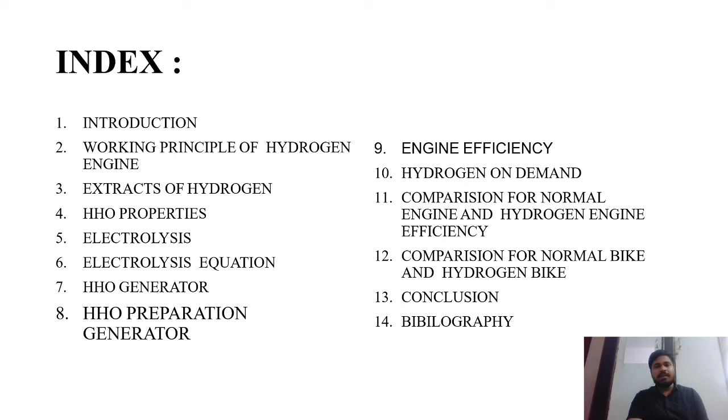In this PPT we will discuss the following topics: index, introduction, working principle of hydrogen engine, extract of hydrogen, HHO properties, electrolysis, electrolysis equations, HHO generators, HHO preparation generators, engine efficiency, hydrogen on demand, comparison for normal engine and hydrogen engine efficiency, comparison for normal bike and hydrogen bike, conclusion and bibliography.

Now we introduce the introduction. The hydrogen vehicle converts the chemical energy of hydrogen to mechanical energy either by burning hydrogen in an internal combustion engine or by reacting hydrogen with oxygen in a fuel cell to run electric motors.

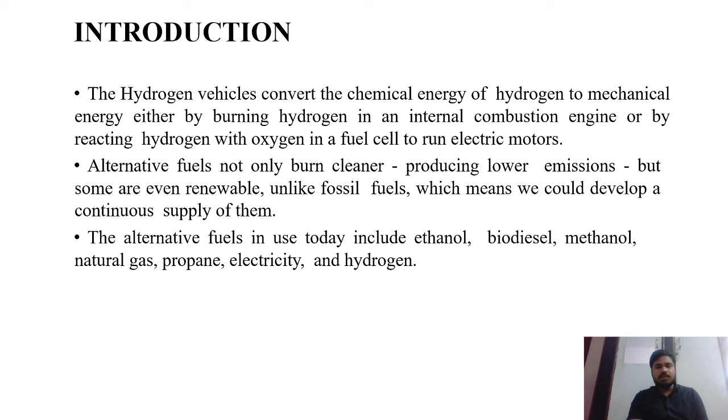Alternative fuels not only burn cleaner, producing lower emissions, but some are even renewable, unlike fossil fuels, which means we could develop a continuous supply of them. The alternative fuels in use today include ethanol, biodiesels, methanol, natural gas, propane, electricity, and hydrogen.

Next topic is working principles of hydrogen engine. Hydrogen engines are considered by many people to be an excellent alternative to fossil fuel engines. A hydrogen fuel cell engine works by mixing hydrogen and oxygen, generating electricity during electrolysis.

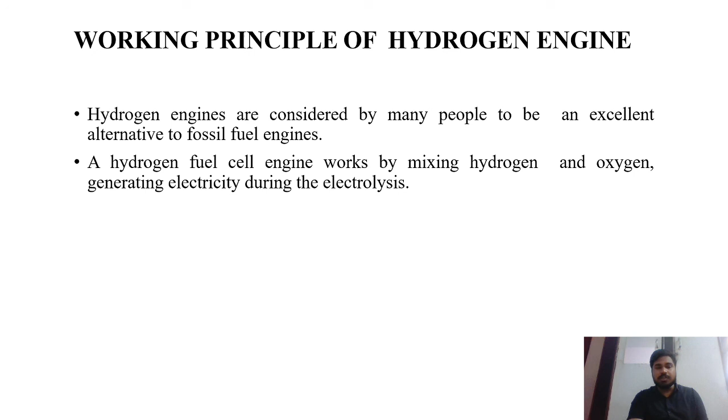The next topic is extract of hydrogen. Hydrogen, natural gas, coal, petroleum gas, electricity, nuclear and biomass.

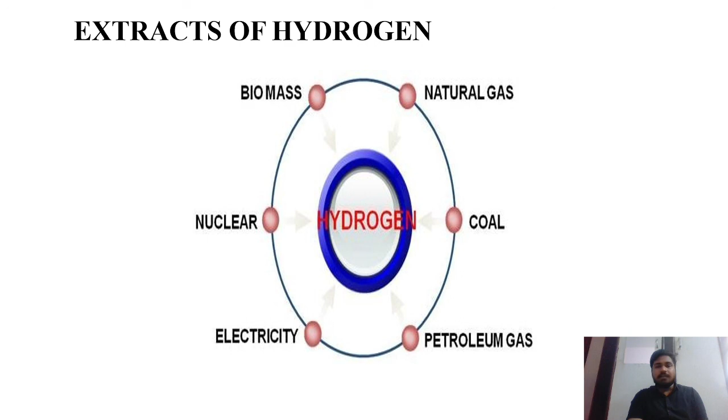The next topic is HHO properties. HHO gas proves to be odorless, colorless and lighter than air. HHO has a number of distinct features that distinguish it from water vapor, brown gas and other variants.

In the production of HHO gas there is no evaporation process at all, the electric energy used being insufficient for evaporation. HHO gas does not follow the fundamental PVT law of gases. Fifth, HHO gas can instantaneously melt tungsten, bricks and other highly refractive substances.

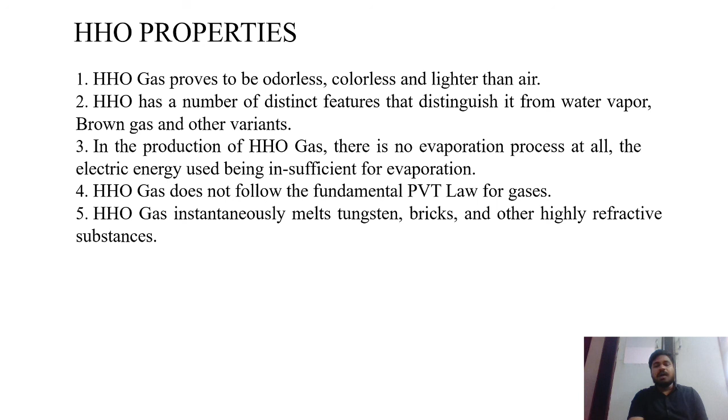The next topic is sustainable path to hydrogen. Renewable energy. Renewable energy sources are of four types: heat, electricity, biomass and photolysis.

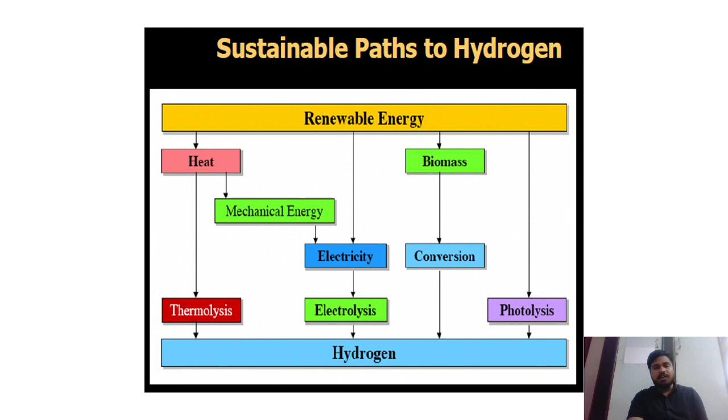Heat, thermolysis converts to hydrogen. Mechanical energy converts to electricity, electricity converts via electrolysis, and electrolysis converts to hydrogen. Biomass conversion yields hydrogen and photolysis converts to hydrogen.

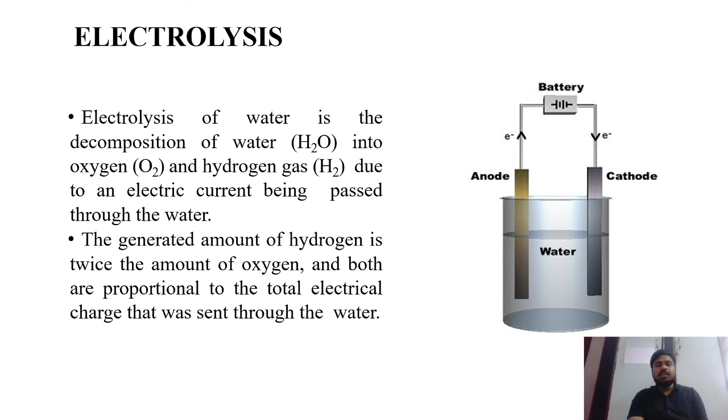The next topic is electrolysis. Electrolysis of water is the decomposition of water H2O into oxygen and hydrogen gas H2 due to an electric current being passed through the water. The generated amount of hydrogen is twice the amount of oxygen, and both are proportional to the total electrical charge that was sent through the water.

The next topic is electrolysis equations. Electrons required for this reduction will come from the power source. The equation is 4H2O plus 4 electrons gives 2H2 plus 4OH minus. Finally, we can supply our overall equation: 2H2O liquid gives 2H2 gas plus O2 gas.

The next topic is HHO generators. The HHO generator is really an electrolysis device based on an invention from the late 19th century. Hydrogen fuel cells, also known as HHO fuel cells, are designed to increase the efficiency of internal combustion engines.

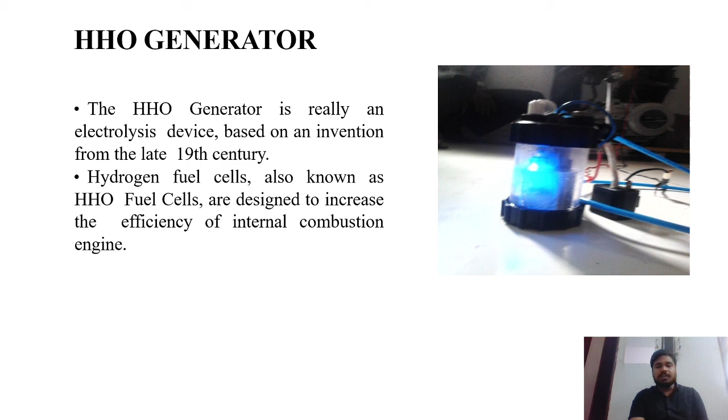The next topic is HHO preparation generators. Four electrodes, tubes are about 3 mm thick and 1, 3 by 4, 1 by 2 inches long, made of stainless steel 304 grade. An 8 mm gas vent hole is drilled from the gas outlet to the cap. The electrolyte level is always about 25 mm below the gas vent hole.

The electrodes are arranged in an alternate manner: minus, plus, minus. The two negatively charged electrodes are connected to each other through gas welding. Each electrolyzer contains 4 sets of electrodes.

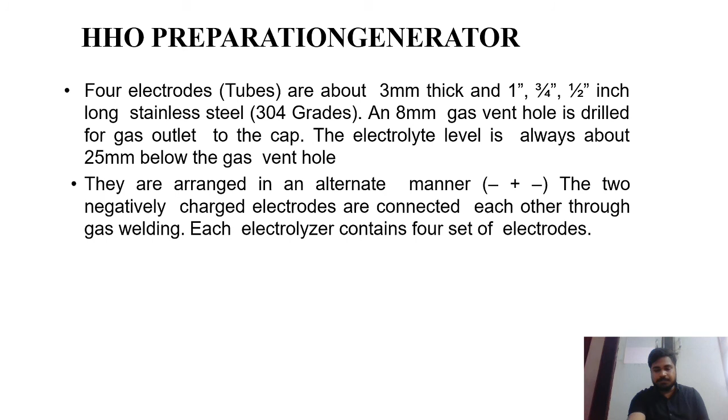The next topic is engine efficiency. Engine efficiency is based on the engine specification. The following power calculations are done, with the nomenclature of the following terms.

N is equal to speed of engine in RPM. T, torque transmitted in Newton meters. PM, mean effective pressure in Newton per meter square. L is equal to stroke length in meters. A is equal to area of cylinder in meters squared. K is equal to number of cylinders. And efficiency.

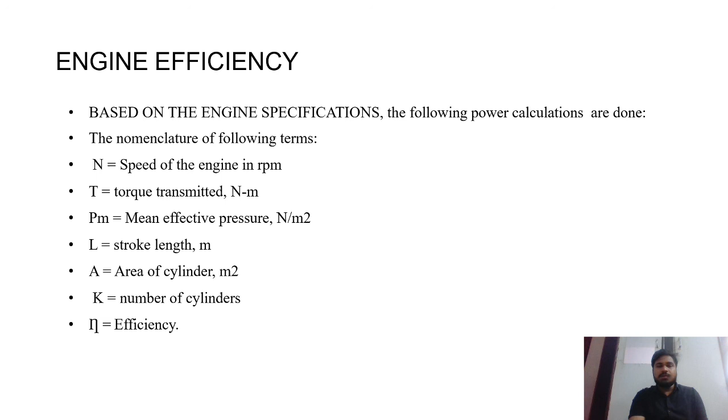Brake power is equal to 2 pi NT upon 60,000 watt. Second is indicated power, equal to P, L, A, N, K divided by 60 watt, where P is pressure, L is stroke length, A is area, N is number of revolutions, and K is number of cylinders.

Third is frictional power, equal to indicated power minus brake power. Fourth is mechanical efficiency, equal to brake power divided by indicated power.

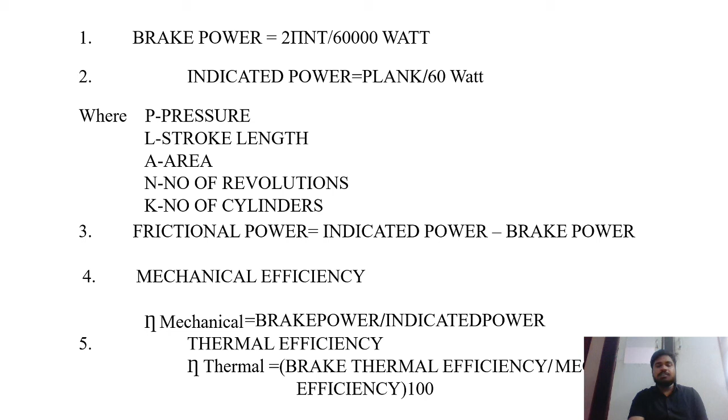Thermal efficiency is equal to brake thermal efficiency divided by mechanical efficiency into 100, where brake thermal efficiency is equal to work delivered by the engine divided by chemical energy in the fuel.

Sixth is relative efficiency, equal to brake thermal efficiency divided by air standard efficiency. Seventh is air standard efficiency, equal to 1 minus 1 upon R raised to gamma minus 1.

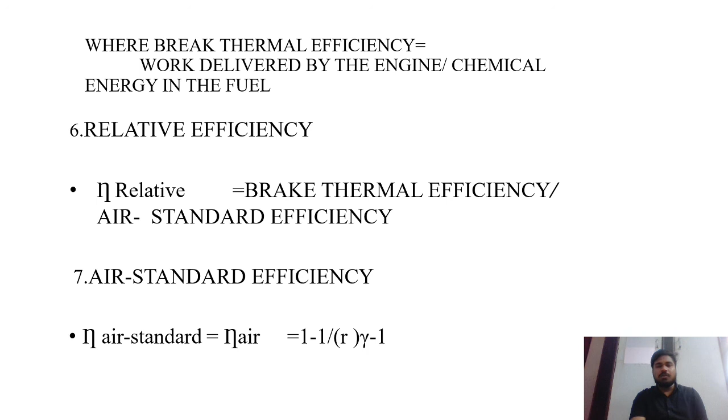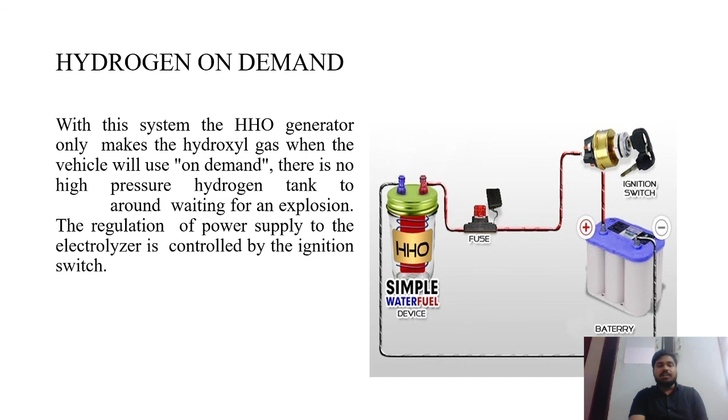Hydrogen on demand is the next topic. With these systems, the HHO generators only make the hydroxyl gas when the vehicle will use it on demand. There is no high pressure hydrogen tank around waiting for an explosion. The regulation of power supply to the electrolyzer is controlled by the ignition switch.

The next topic is comparison of normal engine and hydrogen engine efficiency. Engine efficiency refers to an engine's ability to transform the available energy from its fuel into useful power work. The modern gasoline combustion engine operates at roughly 20 to 30% engine efficiency. The remaining 70 to 80% of the gasoline heat energy is expelled from the engine as exhaust heat.

Mechanical sound energy or friction loss: at idle, the energy efficiency is zero since the engine is not moving the vehicle and it's only operating accessories such as the water pump and generator. The next one is hydrogen engines.

Hydrogen engines provide a high torque density and high power density, efficient engines. Hydrogen is used because it burns 7 to 9 times faster than hydrocarbon fuels. Due to the relative instantaneity of the explosive event during ignition, there is less wasted translational energy that is found in traditional internal combustion engines.

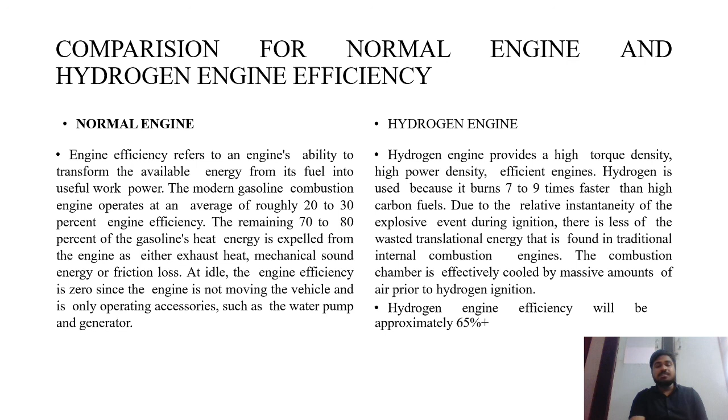The combustion chamber is effectively cooled by massive amounts of air prior to hydrogen ignition. Hydrogen engine efficiency is approximately 65% plus.